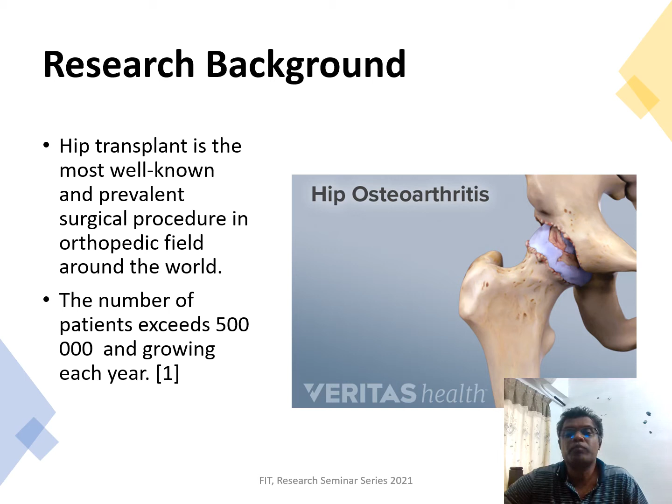At the beginning, the hip ball was replaced by metal. They used a metal fused to the bone by a cement, and a socket made of polyethylene was implemented. But this technique has a major disadvantage: it has a very short lifetime. That means it's prone to failure within 12 years. So those who used this metal as a hip replacement need to replace it after 12 years. That's a big issue with this technique.

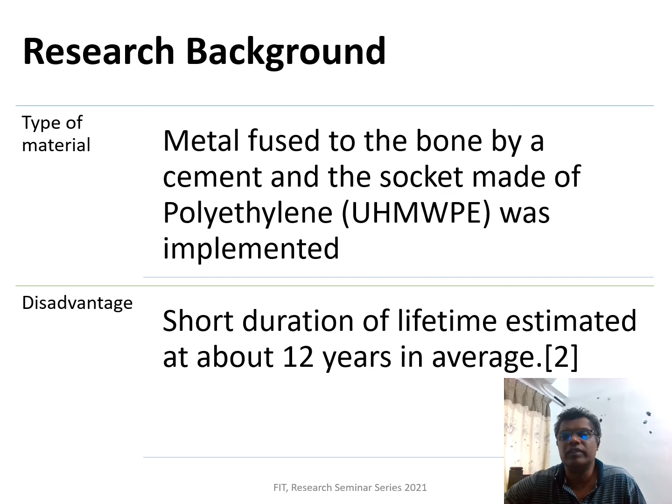Then in the 1990s, another substance called yttria stabilized zirconia was introduced. Zirconia is a type of ceramic. It is added with yttria, and it has certain advantages compared to the earlier material. It has very high fracture toughness and better mechanical strength. That means it does not break easily.

High fracture toughness means if any fracture happens, the rate of growth of the fracture will be small, so it won't damage the overall structure. So it has high fracture toughness compared to the earlier material.

But although it has this very good advantage, it has another disadvantage: it's very sensitive to low temperature degradation. At low temperature, the zirconia grain size starts to grow, and when it grows, the surface of the yttria stabilized zirconia becomes more rough and causes failure. It loses its mechanical strength; the mechanical strength gets weaker when the grain size gets larger. This structure shows the hip ball made of zirconia.

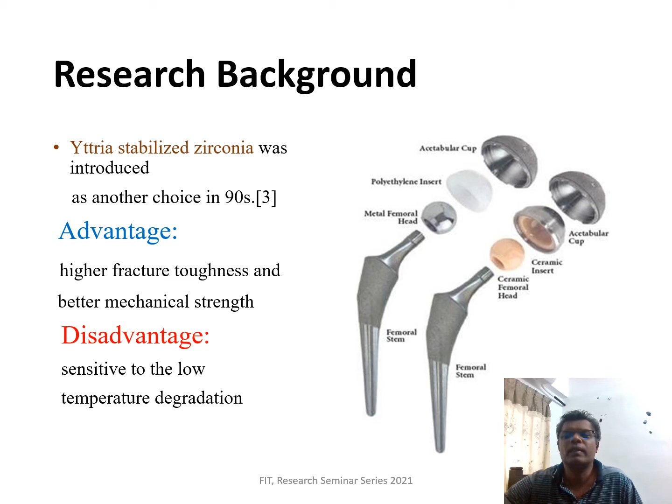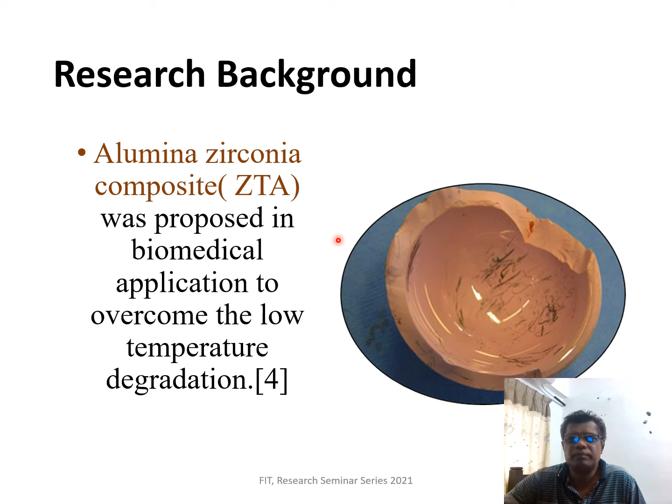Then concurrently another material was used as an alternative to zirconia, called alumina zirconia composite. It was proposed in biomedical applications to overcome the low temperature degradation faced by zirconia. Its advantage is very good hydrothermal stability, and it is less sensitive to low temperature degradation. That means it does not easily become rough; the grain size does not grow as fast as in yttria zirconia, so it is not prone to failure.

But it also has a disadvantage. The mechanical strength of the alumina zirconia composite is found to be 700 to 1000 megapascal, which is average. 3Y zirconia is able to achieve up to 2200 megapascal, quite good mechanical strength. So although alumina zirconia is good against low temperature degradation, it has average mechanical strength, so it can break easily relative to 3Y zirconia.

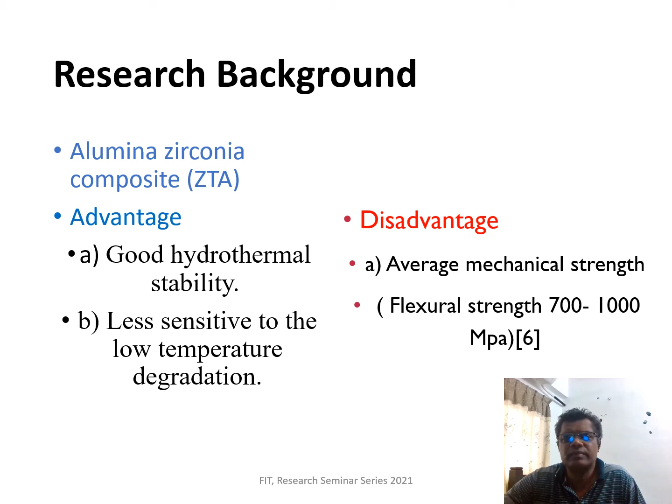So what factors determine the mechanical strength? Of course, the grain size. The smaller the grain size, the more probably it will be in the tetragonal phase, a very stable phase. Research found that more tetragonal phase means higher mechanical strength. So smaller microstructure, better mechanical strength. Second, the technique used to develop the composite determines the mechanical strength, like the techniques used to minimize the grain size.

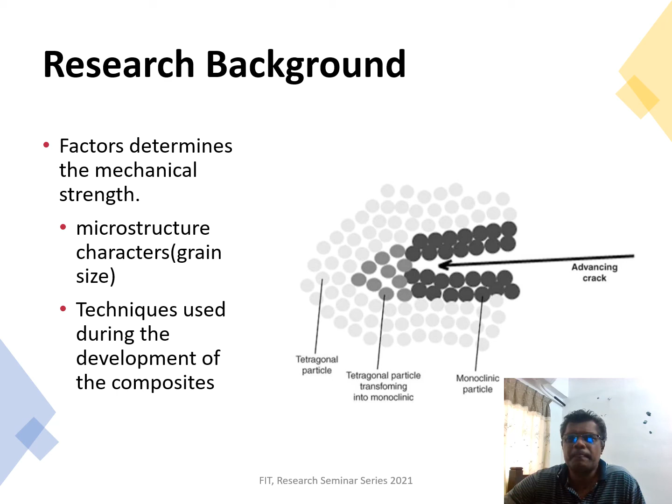So the problem statement for my research is: further research is required for the composite elaboration of alumina zirconia in terms of powder mixing technique, in terms of dispersion, how well the zirconia has been dispersed on the alumina surface, and atomization, pressing and sintering, required to improve homogeneity of the microstructure in powder mixing, to increase the flexural strength more than 1200 megapascal and grain size below 500 nanometer.

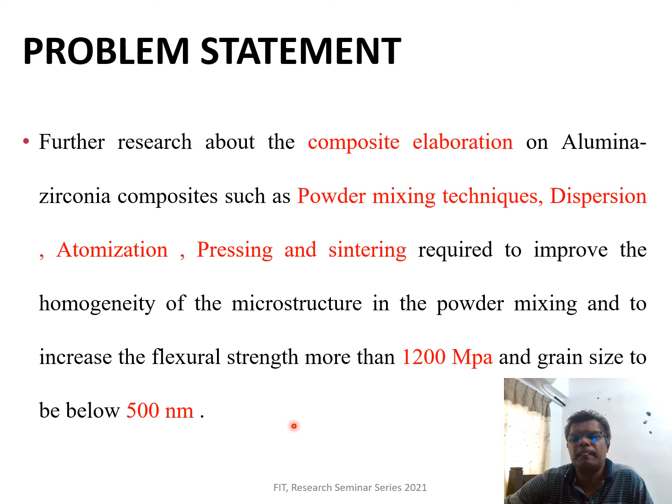So my research objective is to develop a ZTA composite system with optimum volume percentage of alumina and zirconia content that complies with the industrial standard ISO 6474-2:2019. Another objective is to introduce a more innovative, simple and cheaper method to obtain a ZTA composite without compromising the mechanical properties and with acceptable low temperature degradation. And third, to develop a ZTA composite which is capable to withstand high low temperature degradation for biomedical applications.

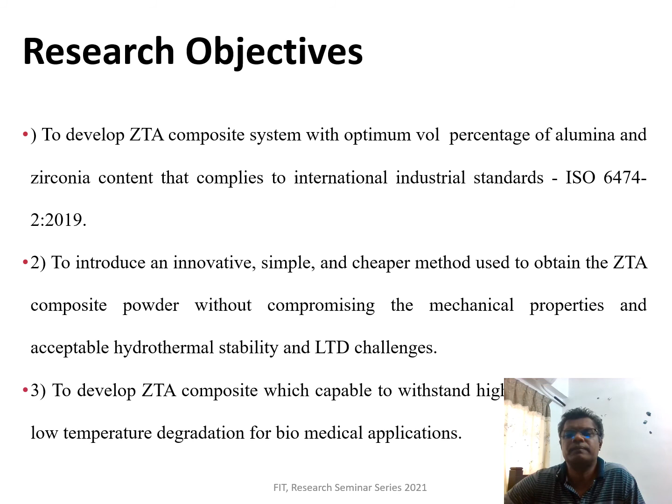So, research method. The ZTA composite is to be developed through a colloidal method. Compared to the normal powder processing, we use a colloidal method, with an optimum volume percentage of alumina zirconia to be found that could exhibit optimum mechanical properties and acceptable hydrothermal stability.

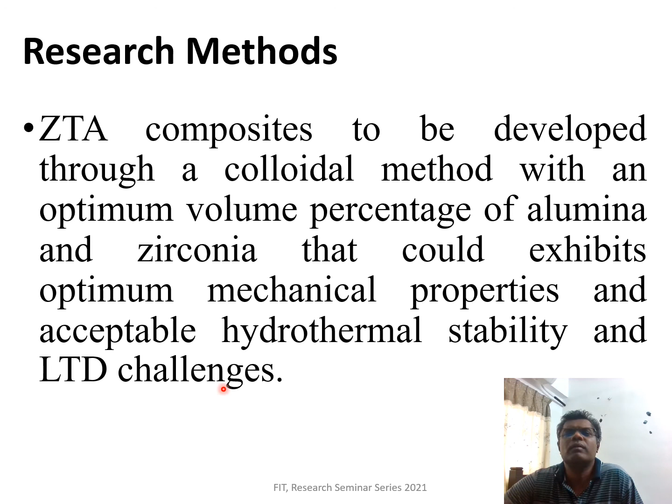So in the development of the green body, first the available alumina powder was modified to prepare the composite powder. The powder must undergo a critical analysis, such as the resistance against temperature, effect of each experimental process, and phase transformation, to be checked carefully. The degree of homogeneity of zirconia grain dispersion in the alumina matrix will be analyzed.

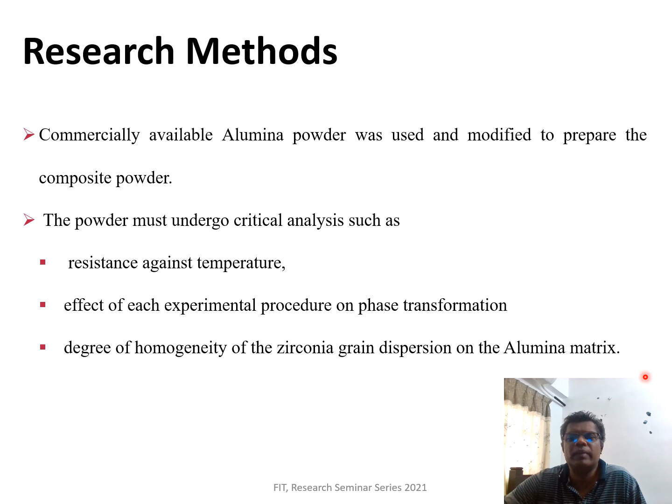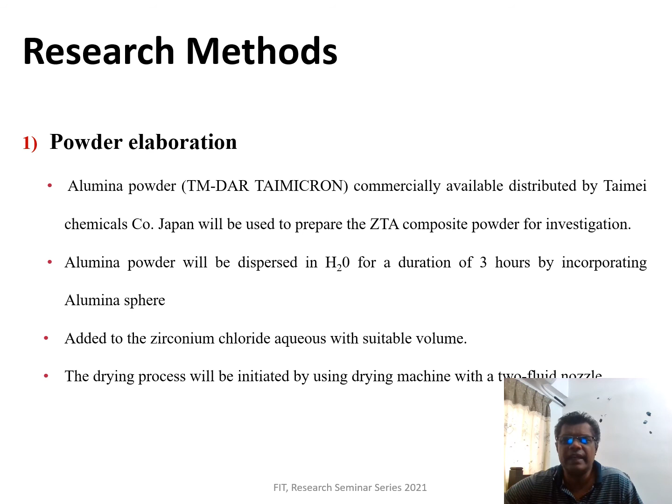Okay, first, the powder elaboration. Alumina powder commercially available from Japan will be used to prepare the ZTA composite powder for investigation. The alumina powder will be dispersed in water for a duration of 3 hours by incorporating with alumina spheres. Then aqueous zirconium chloride will be added in a suitable volume. The drying process will be initiated by using a drying machine with a 2-fluid nozzle, to break them into small tiny powder. Okay, so we use the drying process.

Then the important process in the colloidal method is the slip casting. A liquid clay body slip is poured into a porous mold, producing a layer on the inside walls after a significant time interval. The powder obtained from the isostatic pressing and slip casting will be sintered, a type of process which is used to densify the substance, by using an electrical furnace. After that, hot isostatic pressing at about 1520 degrees Celsius at a rate of 10 degrees Celsius per minute will be used to further densify the green body.

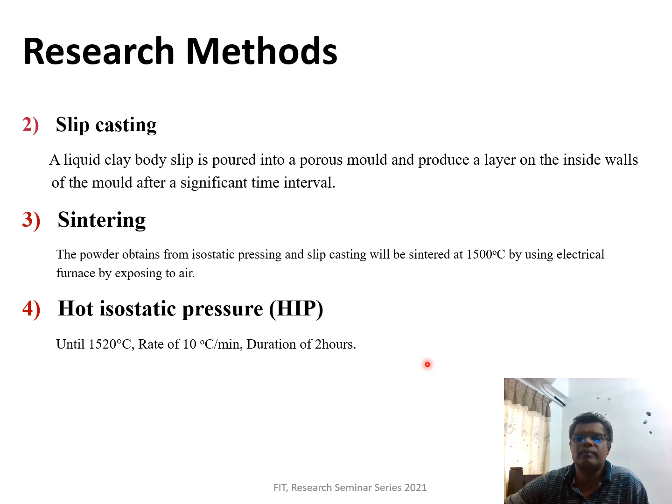Then this is the flow chart of the process. Then finally, it's ready for the mechanical properties evaluation and structural evaluation, such as fracture toughness, Young's modulus, and everything.

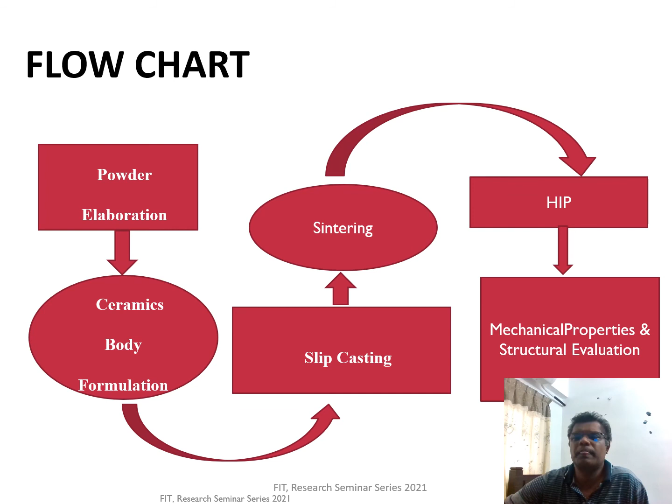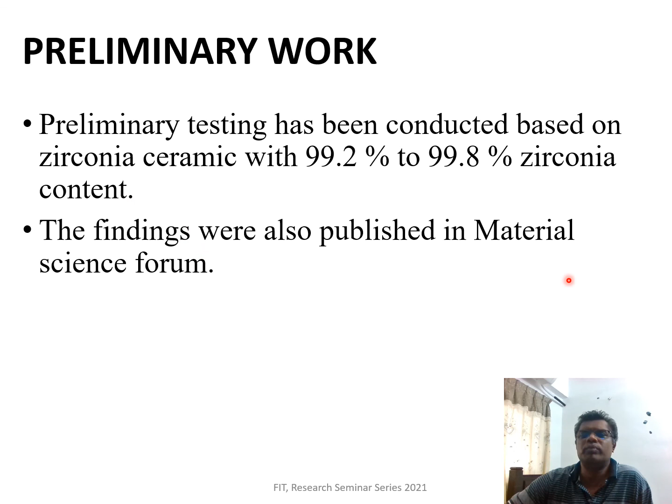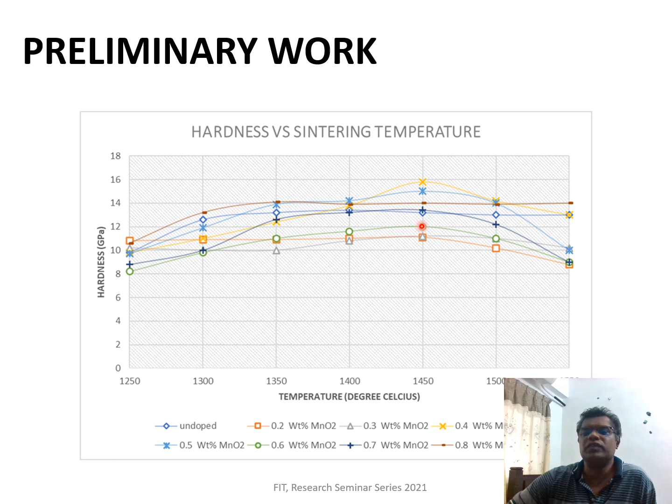So in preliminary work, I did preliminary testing with a composite with 99.2 to 99.8 zirconia content, and the findings were published in Materials Science Forum. The paper has been published, and the hardness of the composite has been determined for different amounts of MnO2, and the toughness has also been investigated. The values of toughness and hardness were improved quite significantly compared to the normal powder preparation. And the grain size was significantly reduced, close to 500 nanometer.

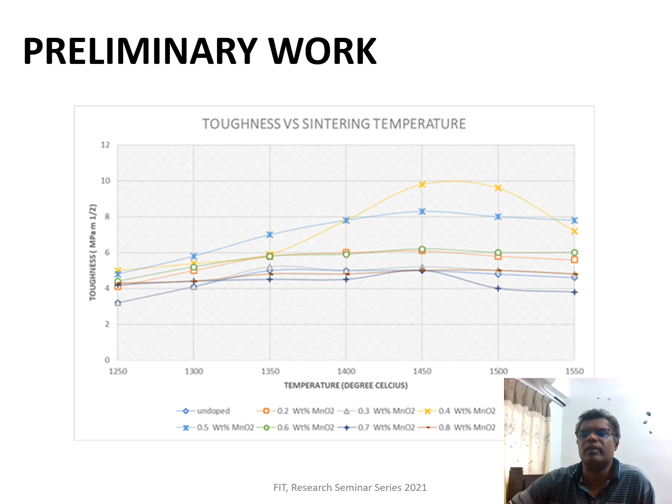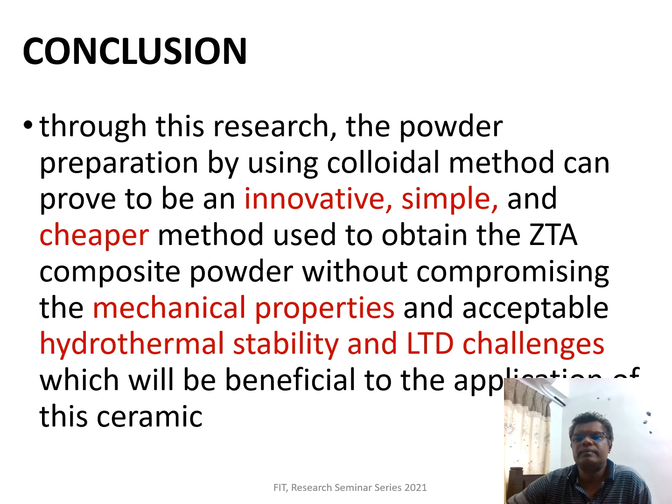So through this research, the powder preparation by using the colloidal method can be proved to be innovative, simple, and cheaper. The composite powder without compromising the mechanical properties and the hydrothermal stability can be achieved. This research is aligned to the National Key Economic Area under Health and Entry Point Project Medical Devices. This research also supports the United Nations Sustainable Development Goals by contributing to Goal 3, good health and well-being.